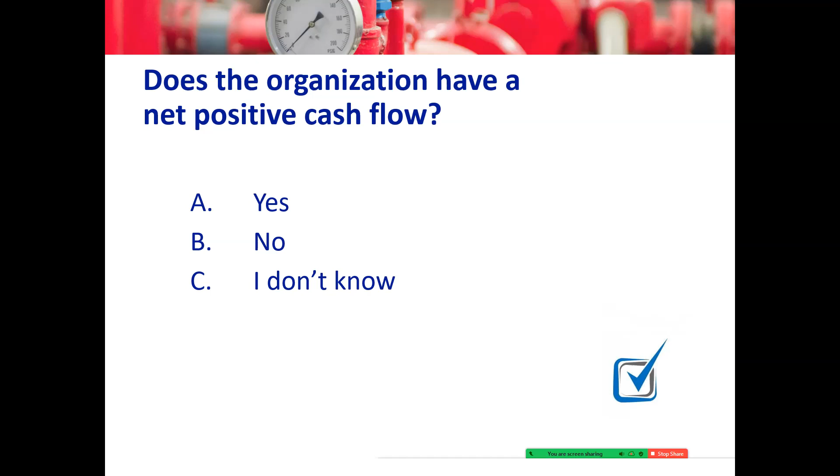All right, so everybody who does know the answer to this said yes. And for those of you who don't know, this too is a reasonable question. Particularly when you look at utility finances and how utilities and public works departments kind of function, there's a lot of internal promotion, and I would generally say if you like your organization, want to stay there and particularly become the boss at some point, you will be involved with finances most likely. So understand that these are reasonable questions to ask. And knowing the answer can help you with planning for your job. And as we will continue to stress, finances are very important for long-term sustainability of your utilities.

Third question here is, what are the challenges to having a net positive cash flow in your utility? So answer the one that's most reflective. You may see multiple stresses on the finances of your utility, so maybe the biggest stress, if that's the case. A, we need to increase our rates. B, we have a lot of debt, so that takes up most of the income. C, we're in need of too many projects. Or D, our funds get absorbed within our organization. We've actually adjusted this poll question to where you can answer more than one. Oh, thanks, John. Yeah, so answer all four if that's the case.

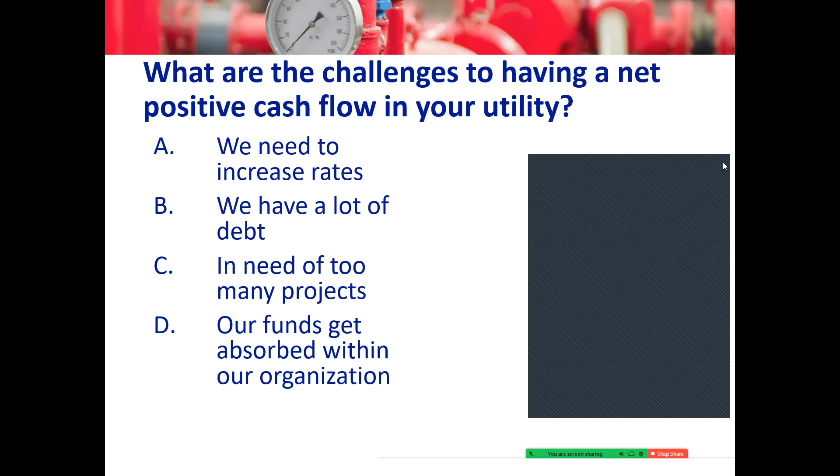All right, I'll go ahead and close this poll in 5, 4, 3, 2, and 1. Looks like a few people did answer more than one here. People answered all of them actually. The most answered was in need of too many projects. Again, asset management can really help with that planning process, and kind of what's coming up next with criticality is really helpful there.

So this is kind of a generalized slide, but for most publicly owned and operated utilities and financial systems, you kind of have two funding sources for keeping things going at your utility. So on the left, we're talking about capital projects. These are things that are larger, such as water main replacement. Some utilities would put expensive equipment, even vehicles, on the capital project side. For these, you typically have a mixture of funding sources that are available.

So we had Mike yesterday with the state revolving loan fund. That is external funding, so you're getting the money from outside of your organization. Internal funding is that which is raised or has been raised and saved, put aside in the past by your organization. So these would be your reserve funds and the flow of cash coming in to your utility monthly from your customer rates and fees. So for capital projects, you can save up money, you can borrow money, you can potentially get some grants. You can issue bonds if that's something your organization can do. You can take out a USDA loan if you're eligible. Occasionally, some utilities will also have a special fund.

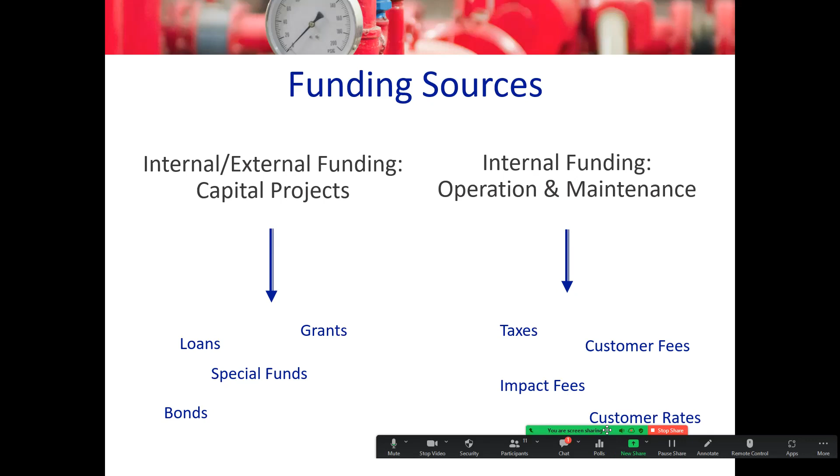All of this needs to be paid for via customer rates, customer fees. Occasionally there's some taxes or impact fees, but for most utilities, the bulk, 95%, is going to be from those monthly customer bills. Looks like we have something in the chat.

Oh, okay, good question from Judy here. She asked, what is debt forgiveness? Is that a grant, or if you have to first have a loan that is forgiven, does it require matching funding from the facility? So debt forgiveness, the state revolving loan funds have it. I've seen USDA rural development loans also have it. It is conditional. So you take on debt.

So let's say you have a $1 million project. You would take out $1 million of debt from the funder. So let's go with the state revolving loan fund. And this is an example, I don't know how Maine structures it. So you actually, as a system, would be indebted for that $1 million. And then there's typically language in the debt agreement that if you meet a certain milestone, then some of the debt is forgiven. I don't think I've ever seen 100% debt forgiveness, so it might be 30 or 40 or something like that.

So if you had that $1 million SRF loan with, say, 30% debt forgiveness, once you met that milestone, so let's say your wastewater treatment plant is up and running and compliant, might be kind of that trigger, then $300,000 would be forgiven, and you would be on the hook for paying the $700,000. So it's very similar to a grant in that you get resources from outside and you don't have to pay them back, but it's not quite as clean as a grant in some ways. If you don't meet it, then you are on the hook for that remaining money.

And if it were, oftentimes with any sort of an infrastructure grant, the match fund is actually going to be some sort of debt instrument. So your utility may get an SRF loan to be a match for a community development block grant, for example. Something like that is relatively common. I hope I answered that. Feel free to chime in the chat if there's further on that. So it's close to a grant, but it's a little different mechanics, to kind of oversimplify it.

Okay, moving on to rates. So rates are extraordinarily important for financial sustainability, for the ability to have operators like you have regular paychecks that don't bounce. And they're important for both that operation and maintenance, again, you basically have to have that internal funding, and also for your capital, because the rates for your water systems and sewer systems are going to almost always include money that is paying back previous loans for past capital improvements.

So maybe you had new lift stations put in 5 years ago, and you took out a USDA rural development loan or an SRF loan. More likely than not, some of those customer rates and fees are going to pay back that loan. Rates should be fair, equitable, and cover full cost, including reserve accounts. We do day-long trainings on this.

There's some pretty sophisticated work going on with how do you sustain utilities, particularly in communities that have maybe lost population or have very low household incomes. Because pipe's not any cheaper, pumps aren't any cheaper in a situation like that compared to a well-off community. So how do we ensure that people have quality services and health and environment are protected, and we don't overburden people? So there's a lot of discussion around equity, and the funders are taking that into account. They're very knowledgeable about that.

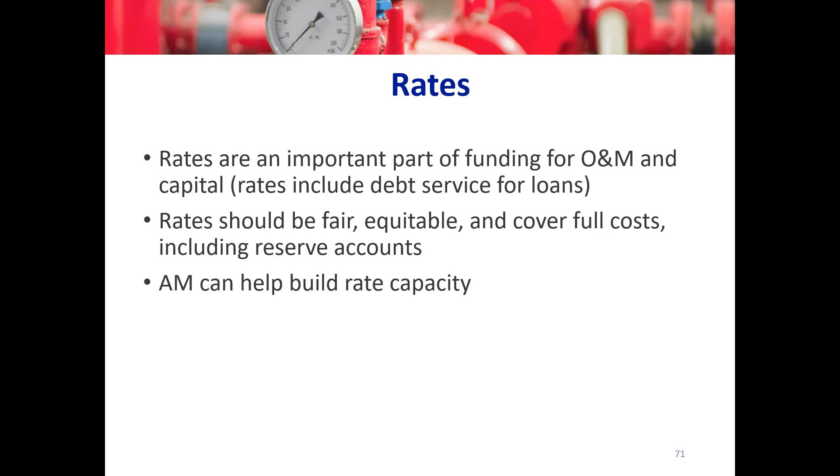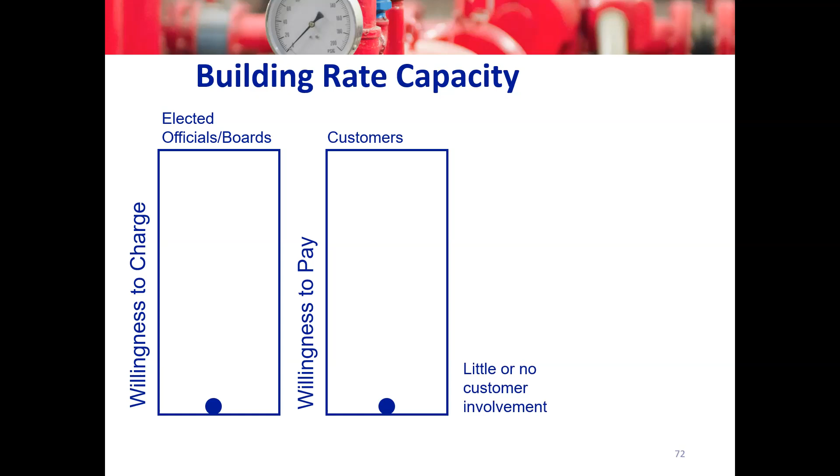The idea of rate capacity is that most communities have water and sewer rates that are not approaching the affordability for most of their customers. And in communities that have an elected official or board, there's kind of a willingness to charge, and then customers also have a willingness to pay. If you value the water or sewer service, you're going to be more willing to pay than if you kind of take it for granted. Unfortunately, utilities have often been quite reliable and quite cheap, so a willingness to pay is often not that high. We see with little to no customer involvement, both the willingness to charge and the willingness to pay is often relatively low compared to the ability to pay.

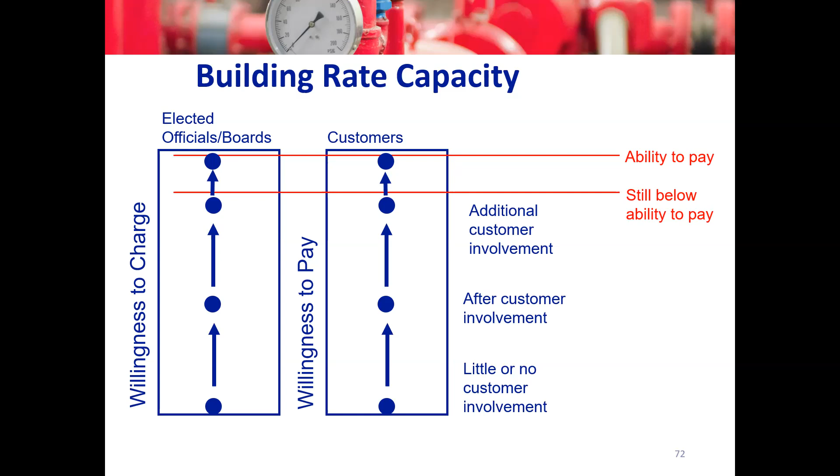Eventually, you do hit affordability thresholds. That's when things like grants, loan forgiveness become more important. And often it's some sort of an affordability threshold that the funder is taking into account when looking at, do I award community A or community B the grant? Oftentimes it'll come down to kind of the burden that utilities are placing on household incomes as a deciding factor.

Turn off my video here. This is a really good description of rate capacity from Louisville, so I'll let him take it from here.

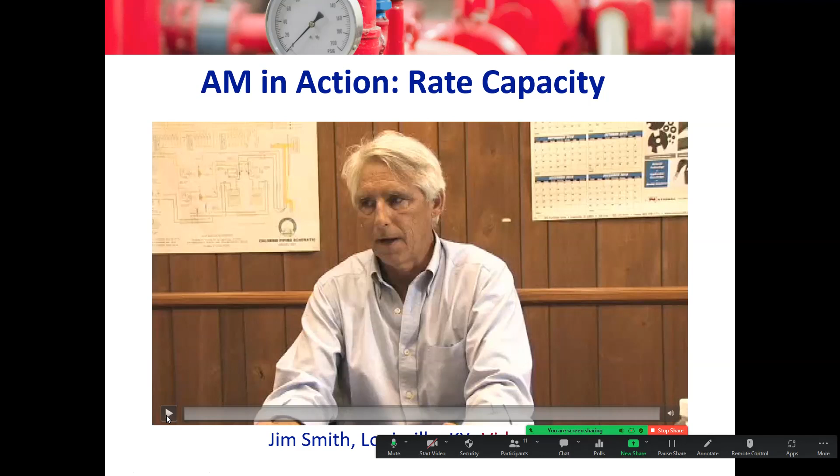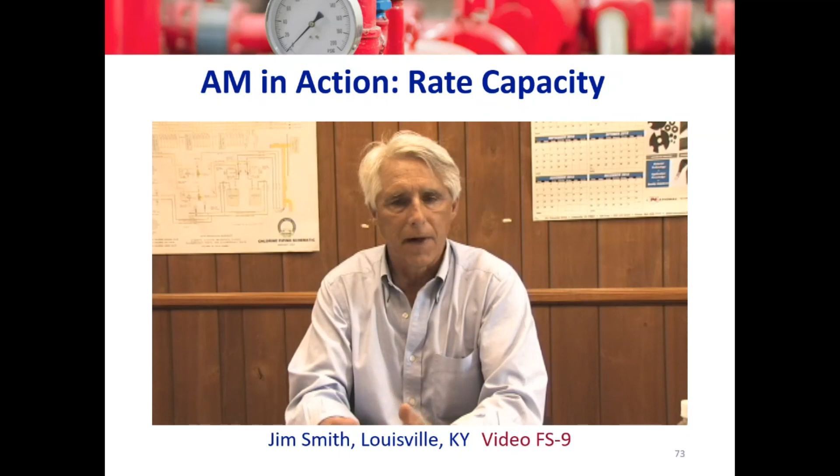I think if you ask customers whether they want another 20 cents on their bill a month to fund an infrastructure reserve, sure, you know. Now, at what point does that get to the point where we say, no, I don't want to do that anymore? But yeah, I think there's a lot more rate capacity out there if you bring your case to your stakeholders, which includes your customers and public, on what you're doing, and then follow it up with doing it and doing it well.

I'd also like to stress some funding for energy efficiency, and with both the bipartisan infrastructure law and the Inflation Reduction Act, I need to come back and relook at this slide because a lot of it is focused on climate change issues. For wastewater utilities in particular, water utilities to a lesser degree, energy can be a pretty big driving force of your cost, and there's often some pretty good savings. Energy efficiency projects sometimes can get different types of outside funding. So you wouldn't necessarily be going through the state revolving loan fund or USDA rural development utility loans.

You might be going through what's called an energy service company or an ESCO. And basically you're accelerating equipment replacement and maybe installing better control systems. The theory here is that your utility would take on some sort of debt, and the monthly or annual debt service is going to be less than the energy savings, potentially chemical and water savings as well. And therefore, everybody is kind of cash flow positive.

The energy service companies make some money by doing the project, and probably make a spread on the loan as well. And you as a utility have hopefully newer, more reliable equipment. You're saving a little bit of money on energy, and you're locking in that savings over the life of the equipment. So that is something to consider if you are looking at energy efficiency projects.

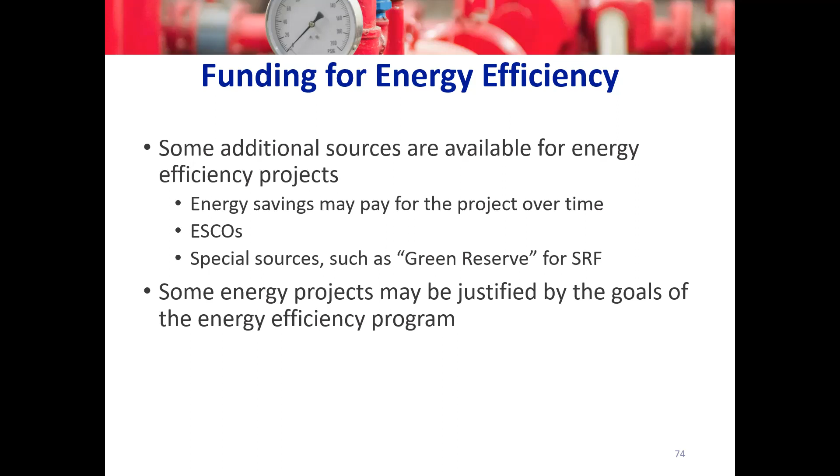Kind of depends on what your ammonia limits are, but there's still a lot of low-hanging fruit out there on the wastewater side. We're going to move on now to the fourth core component, that being criticality.

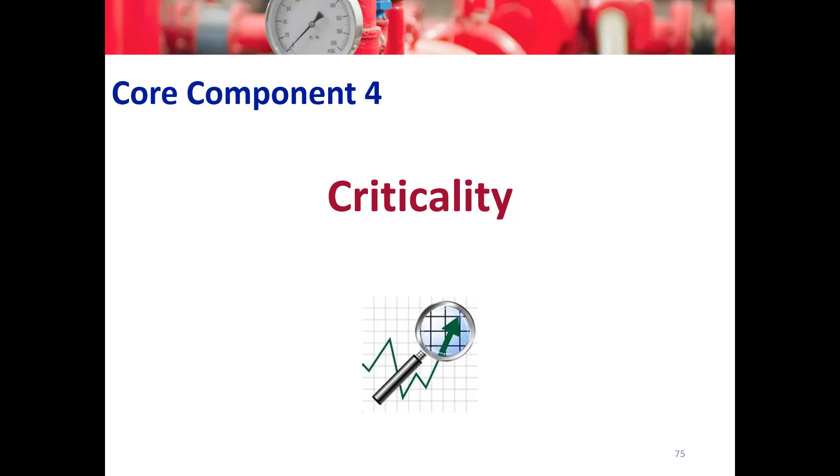So criticality is kind of my favorite. I think it has the best exercise of this 2-day training as well. So we'll just kind of get right into it. There's a few different components of criticality, and there's a lot of good online resources with regards to it. If this piques your interest, I'd suggest also reading up on the issue of redundancy when looking at criticality. This training doesn't go into it too much, basically for lack of time, but that also plays a very big role in criticality.

So, for the sake of this training, we're basically looking at two different components of criticality. The first one is, what is the probability or likelihood that an asset is going to fail? Is it high? Is it low? Is it something that's likely to fail multiple times in a year, or something that's likely to fail less than once a decade?

That's one thing we're looking at, but we also need to keep in mind failure isn't necessarily breaking. You might have, perhaps, a water well, and the well has MCLs. Let's say arsenic or nitrate has been creeping up in past years. The well's in perfectly fine shape—if we were giving it a condition assessment, it would be a 1, very good condition—but the well is going to fail to provide the level of service necessary if that nitrate or arsenic level continues to climb, because you won't be able to meet that MCL anymore.

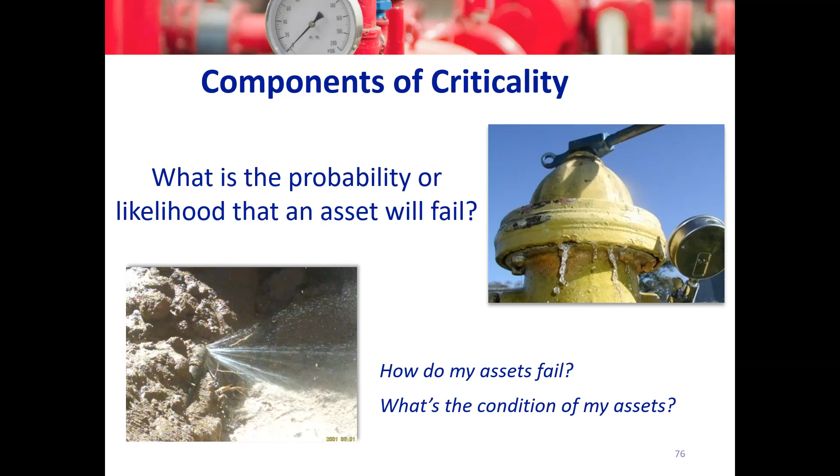Generally speaking, things that don't have moving parts tend to have longer lives than things with moving parts. So you would expect a water main to likely last longer than a fire hydrant, and a fire hydrant likely to last longer than, say, a blower system at a wastewater treatment facility. So that's another thing: how long does this type of asset last in general? The answer is the more moving parts and electronic components it has, the shorter the life generally. Those that are just a piece of metal standing in the air or buried underground, or a piece of plastic like that, tend to have lower probabilities of failure and longer lives.

The second thing we look at with criticality is, what is the consequence if the asset were to fail? For this, we have to look at consequences in a couple different lights.

Let's look at that water main break. Generally speaking, a water main break for most utilities is going to cost somewhere in the $1,500 to $2,000 range to cure, maybe a little more in Maine because you have to dig deeper holes, and it takes longer than here in Kansas, where our water mains are typically about 3 feet deep. I imagine yours are quite a bit deeper. So the cost to repair, maybe $2,000 to $2,500 for a typical water main break, by the time you have the labor, the street repair, the repair parts, and the loss of water. That's the cost of a water main repair.

However, there can also be other costs imposed on society. There can be legal costs, and there can be environmental costs from certain types of failures. On the wastewater side, there are a lot of permit violations related to sanitary sewer overflows or sewer treatment plant bypasses, and there's often a legal consequence for that. Oftentimes there's also an environmental consequence, and in some cases social consequences. Environmental consequences could be a fish kill. Social consequences could be something like a beach closure because the sewer plant hasn't effectively disinfected and it's not safe for water contact.

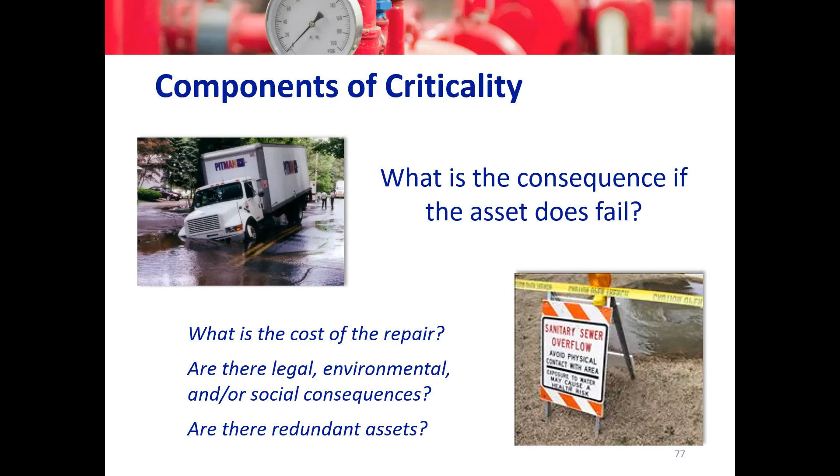So when we look at asset management planning and reinvesting in water and wastewater systems, one thing we often really emphasize is looking at the critical assets of your utility and investing in those assets at a higher rate than those that are not very critical. Likewise, when we look at operation and maintenance activities, it's generally better to direct your O&M toward the critical assets, so those you've identified as very critical get more attention, and those not deemed very critical get less.

So this question is asking if your organization has its assets prioritized by criticality.

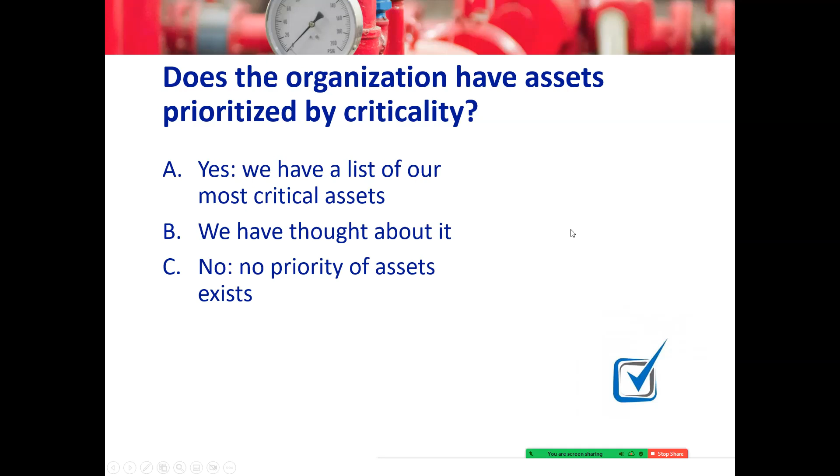So the next question here is, do the needs of the most critical assets drive investment decisions? Answer A, yes, we focus spending on our critical assets first, or B, no, but we need to get a system in place to do so. I do understand that B is a leading answer, leading question, I guess.

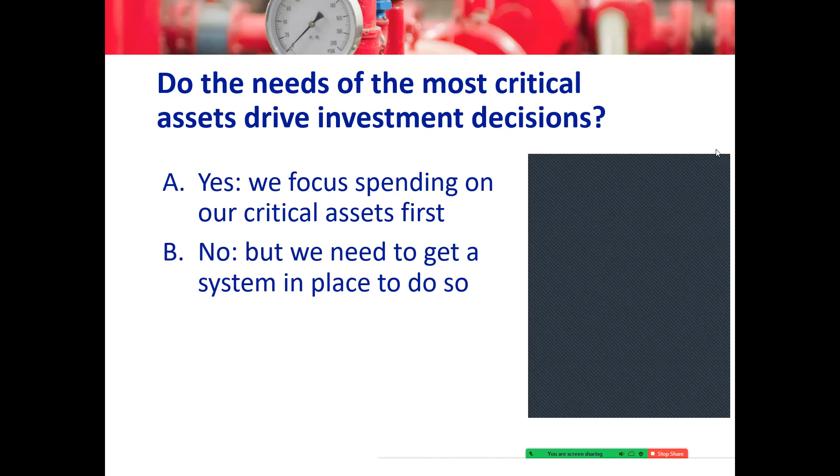Back to Louisville, he talks about criticality with regards to social consequences, like what happens if a system fails to our customers. Ultimately, that's why your utilities exist. Does it feed a critical customer? Does it feed a hospital? Does it feed a school? Does it feed a medical complex? So that's one consequence.

So when you start looking at doing risk assessments on your pipe, which essentially is what that pipe evaluation model did, but now we're doing more formal risk assessments, you've got the probability of occurrence - standard risk assessment stuff, how likely it is to fail. And secondly, what's the consequence of the failure? Part of the consequence is the cost of that failure, and then what it does to the service to the community. So if you have a pipe that, if it fails, puts out 200 people versus a pipe that puts out only 20 people, well, you need to spend more investment on that 200 people than you do on the 20 people, or at least do that first.

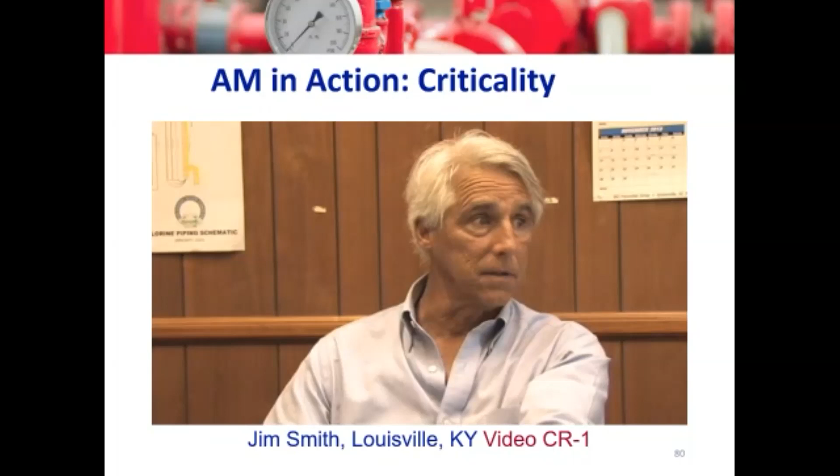So at the end, he's talking about where the investment should be headed.

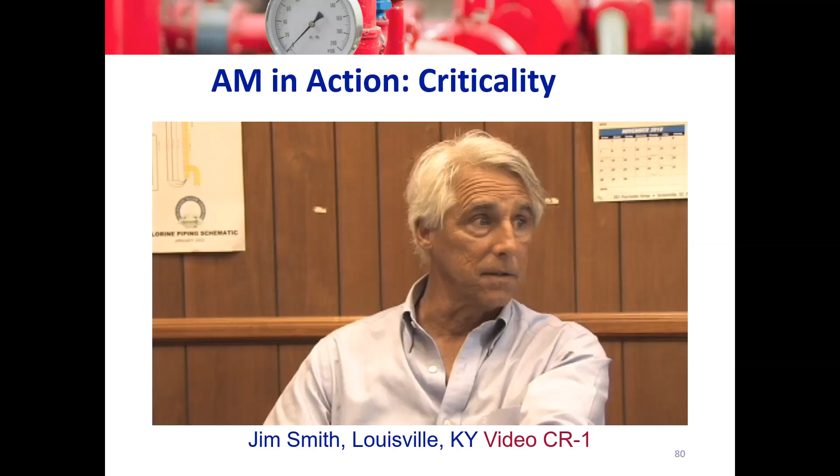We also try to outline this in a visual fashion, and we'll be doing this in an upcoming exercise. But the basic idea here is that you can group your assets into various risk categories. So the highest risk assets are going to be those that have a high probability and also a high consequence of failure. Let's think of a very large pump that's been in service for 35 years and has been having recent problems. The probability of failure is pretty high on that - there's moving parts, it's old, a good combination there that the failure might occur soon.

A large pump, at a minimum, to replace it is going to be quite costly for most utilities, and you will see consequences vary based on the utility.

So for most smaller utilities, a large pump failure is going to be pretty consequential just because it costs a lot of money. It will be more consequential if that lack of service, having that pump be offline, interrupts service, interrupts fire flow. Those are other consequences that may occur should it fail.

So basically, by rating the probability of failure and the consequence of failure of the assets in your community, you can begin to see those that are the higher risk, medium risk, and lower risk.

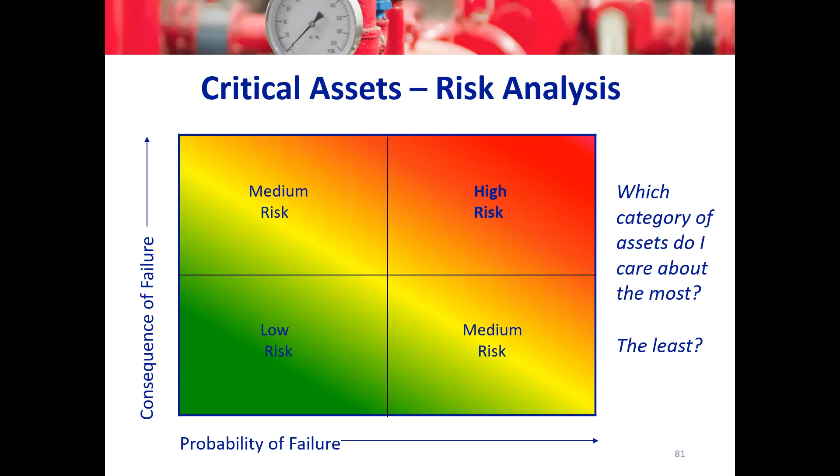Likewise, you only have so much money to reinvest every year. Which assets am I going to replace or rehabilitate? Ranking them by criticality is a good way to help reduce the risk of your assets.

Here's some of the work on the sewer side with regards to collection systems. I think on the collection system side, we were, up until about 10 years ago, totally reactive. And when CMOM, that phase started coming into place, then we truly became more proactive. And then we were finding a lot of our problems, collapsed pipe and et cetera, that we didn't even know were there. But then where we needed to take the next step was implementing the asset management program.

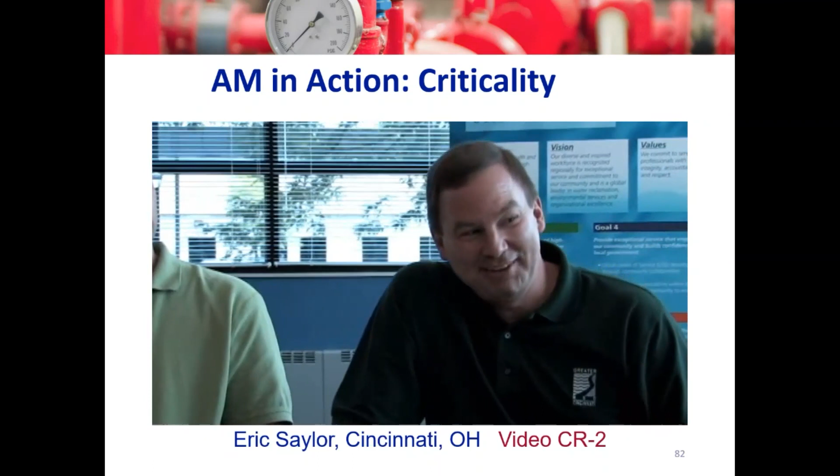Then there was no prioritization of that proactive work. We were treating our major interceptors with just as much importance as an 8-inch sanitary line in a cul-de-sac. And if you're living on that 8-inch sanitary line in the cul-de-sac, that is the most important thing to you possibly. But as a whole, as managing a department and managing your assets, you have to treat those differently.

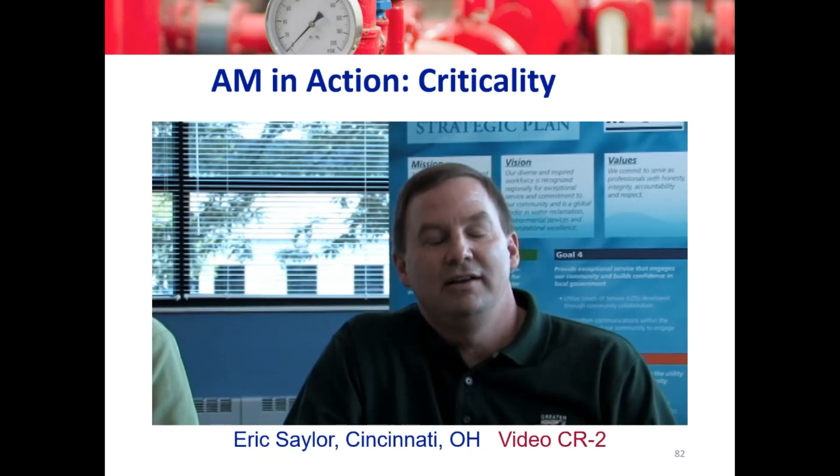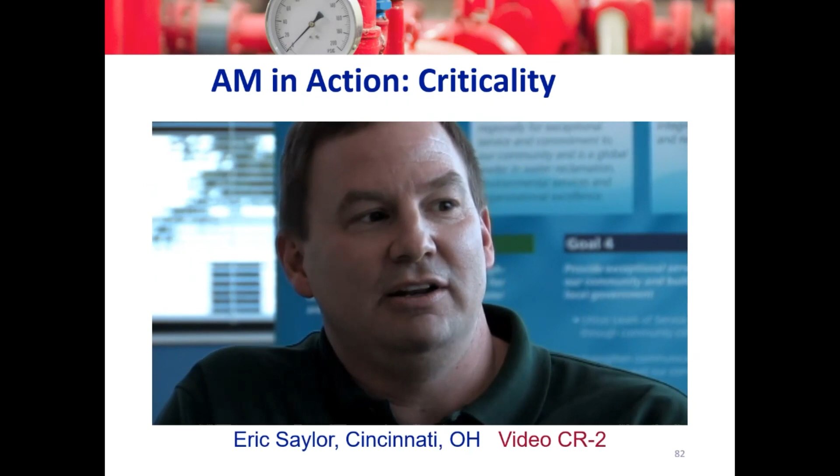And so one of the first things that we did on the collections side, under the strategic plan, was to form that risk task team. And that risk team was set out, their mission was to help us develop that criticality of the assets. What are our priorities as far as our maintenance goes? To be proactive, but yet to be logical in the proactive nature. And then in turn to develop that probability of failure, so you can properly prioritize your capital investments.

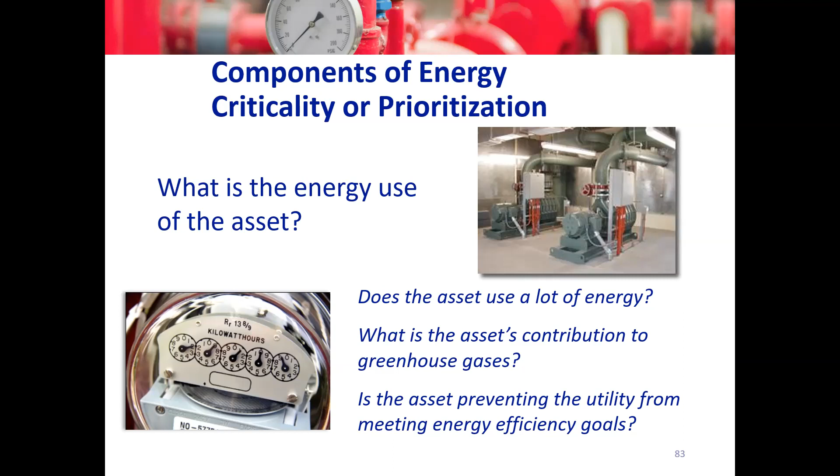So yeah, what he said, I think he laid that out well. I'd also like to highlight energy savings. So you can prioritize energy efficiency and energy savings projects in a similar manner to how you prioritize the criticality of your assets. You often would ask, what's the level of energy use of the asset, and then also what is the amount of potential savings of the asset.

So you can plot energy usage on the horizontal, feasibility of addressing energy usage on the vertical. A couple examples here: water is really heavy. If you have a large pump that's lifting water, your energy usage is going to be relatively high. Now, the feasibility of addressing that energy use maybe is medium-ish. You can get a more efficient motor, maybe put a variable frequency drive that would save some. But ultimately, you're going to use a lot of energy because you're lifting something heavy from a lower elevation to a higher elevation, so the feasibility isn't going to be super high on something like that.

On the other hand, let's say you have an old incandescent light bulb somewhere in your treatment facility. The energy usage in that, relative to your entire system, is going to be relatively low. But the feasibility of addressing the energy usage of an incandescent bulb is really, really high. I mean, you can reduce the energy use like 90% by going to the hardware store and getting a $3 light bulb in most cases. So the feasibility of that is going to be very high.

I will tell you, I used to be in the utilities at Hays, Kansas. We had an old activated sludge plant with anaerobic sludge digesters. And our sludge pump from the digesters was an old diaphragm pump, driven by compressed air. So the pump was a single point of failure in the plant. There was only one there, and it would have been kind of hard to put two, just based on how the plumbing was. And that was a relatively high consequence of failure.

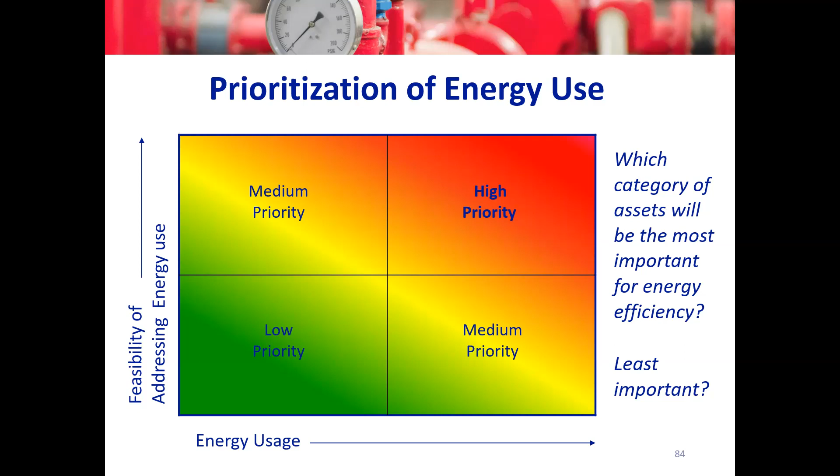So we're going to overlay energy use and criticality here. This old diaphragm pump, the probability of failure was pretty high. We'd had a lot of problems. It had a lot of years on it. I think parts were getting hard to find. So the probability of failure was towards the high end.

The energy use was also quite high. It wasn't blower-high, but it was higher than most things, and part of that was because it had a lot of moving parts. The energy use was high because its energy source was compressed air. Air compression is typically about 20% efficient, and then the diaphragm pump itself maybe is 60% efficient. So your energy efficiency from the wire to actually moving the liquid sludge is very, very low. That makes for very high feasibility of addressing energy usage, because you have like a 20% feeding a 60% — multiply those two together and you're like 10% efficient or something like that. So there's a lot of room for energy efficiency there.

Likewise, there's a lot of room for addressing consequences of failure. So we put in a type of screw pump, very simple, very low speed, also brand new. The efficiency of that from the wire to the water was probably in the 80%. And it was also just going to be more reliable, fewer moving parts, simpler design, much more energy efficient. So we had a high risk, high priority asset in our sewer system, and we replaced it and made it a pretty low risk and low priority asset from an energy use standpoint.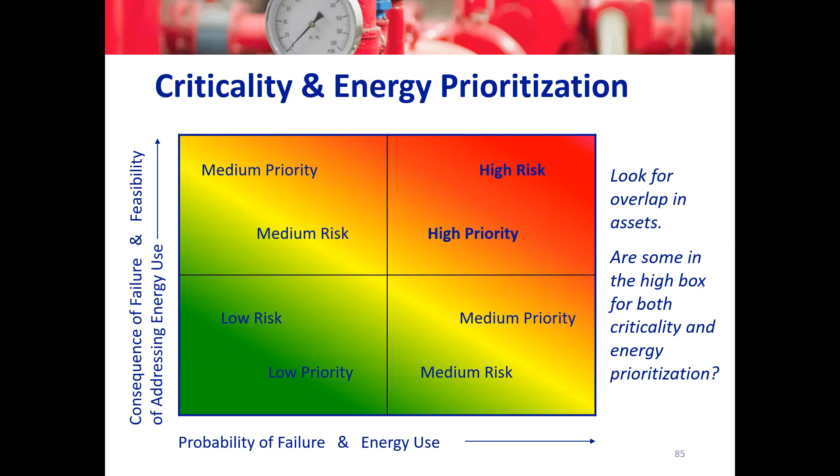It's important to keep in mind that criticality is something you have some levers of control over, but it's also a moving target, because your community changes over time. Where the schools are located, where a nursing home, where a hospital, where a factory is located, all can change over time. So we're going to go into a criticality workshop here.

This is from the AM KAN Work manual, which John will be providing a link to. These are worksheets that can be done for your own utility assets. It's important that we have a date on them, because as I mentioned, criticality can change over time. So what is a critical, high consequence of failure asset today, may be a lower consequence of failure asset 2 or 3 years from now, because something has changed, either your management and/or the customer base of your community's systems.

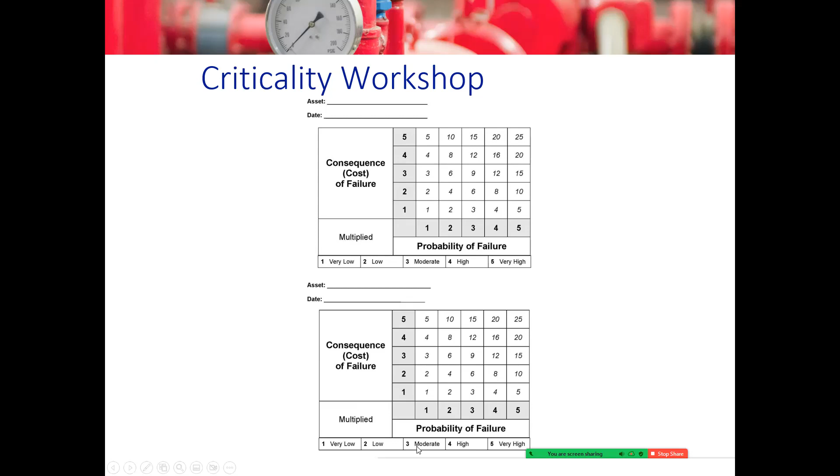So we're going to begin to walk through here. From yesterday, we have that well pump and that sewer pipe. Again, that well pump, we kind of said it's in pretty good shape. When it comes to redundancy, it's important to note that there's a well field and 2 wells exist, either of which can supply Green Village. So we have some redundancy there on that well pump, and likewise we have some redundancy with an upcoming asset that you'll see. Now that wastewater asset, that was the old concrete sewer pipe on a cul-de-sac.

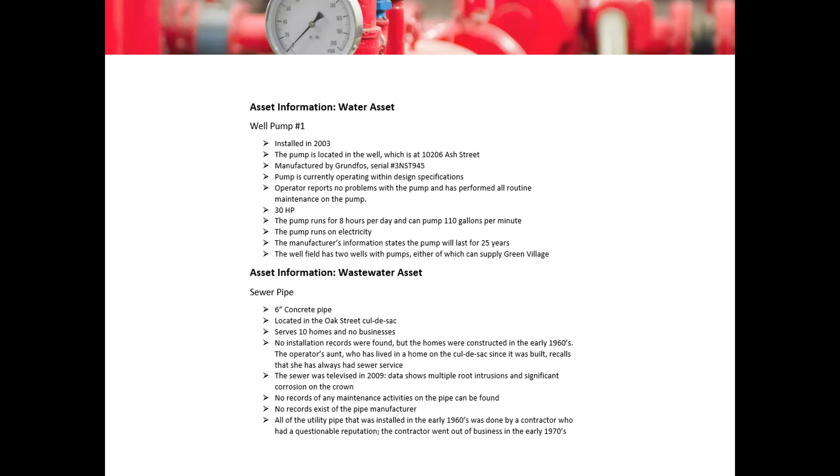I think we agreed it was like a 4, so pretty poor shape as far as the condition of it. We're going to introduce some new assets for Green Village here. The first one is a storage tank, 100,000 gallons. We know where it is. It was inspected and repainted back in 2002, so that's probably getting towards the end of that paint job. The operators perform visual inspections, but like most water operators, they're not tank experts. They haven't noted anything, so it's probably in relatively good shape.

It is possible to pump water directly from the well field to the customers, but the ability to provide fire flow is compromised, and it's often difficult to meet peak demands. And that makes sense. The wells can supply 110 gallons per minute. If you have both of them on, you're probably not doubling that flow. Maybe you can get 150. So you're not going to have fire flow in your community with a situation like that. The utility manager would like to add a new tank to help store water for firefighting.

Now, we're going to throw in another wastewater asset. So this is a surface aerator on the community's oxidation ditch. It's 125 horsepower fixed speed, so pretty high energy user. They think it was installed back in 95, and it's had a lot of problems in the last couple of years. So 11 total repairs in the last 2 years.

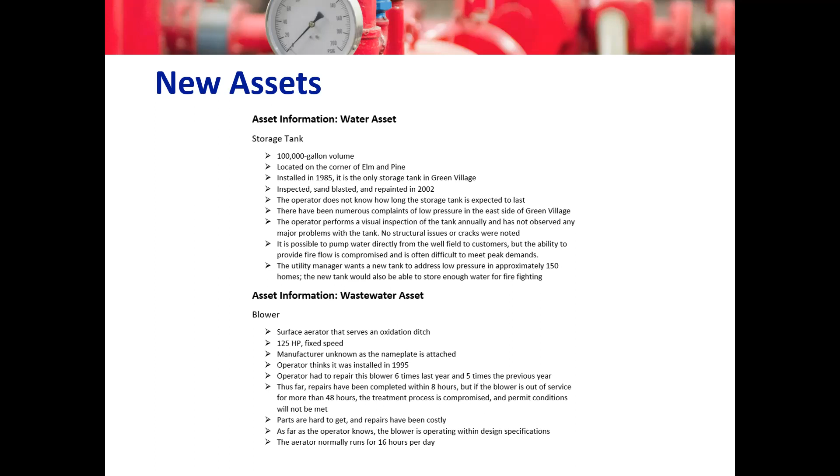They've been able to keep it going, but if it's out of service for 48 hours or more, the treatment process is going to be compromised. Permit conditions will not be met. Likely you'd be missing on ammonia, biochemical oxygen demand, and things like that. Parts have been hard to get and repairs have been costly. The operator thinks it's operating within the design spec. It runs 16 hours per day, so pretty high use asset.

All right, so we're going to try and outline these assets for the village of Green Village. So we're going to walk through this first, and then we'll be taking the temperature of the class for the additional assets. So the sewer pipe, when we're looking at the probability of failure and the consequence of failure in this example, we're going to give the probability of failure a 3. It's been in bad shape for quite a few years now. I believe the television was from 2009. It's still going. So probably not imminent risk, but certainly something that we should take care of.

The consequence of failure, we're going to put it at a 3 as well. So yes, it would be pretty consequential for those 10 houses in the community who receive service. But when you're looking at the whole broader system of Green Village sewer, it's probably not that big of a deal. So there's a lot of uncertainties. There's a lot of questions we don't know with this pipe. So when we're looking at gauging criticality of an asset, for this sewer pipe, there's quite a few things we can probably get more information about that can help us understand that probability of failure.

So the easiest one, the most logical, is run a sewer camera through the pipe. It's been 12, 13 years at this point. Things may have changed. They may be more or less the same. So being able to compare how things are versus how they were would be very valuable. If I were running or operating this utility, that'd probably be my highest priority to understand that probability of failure. Just get pictures, understand what's going on there.

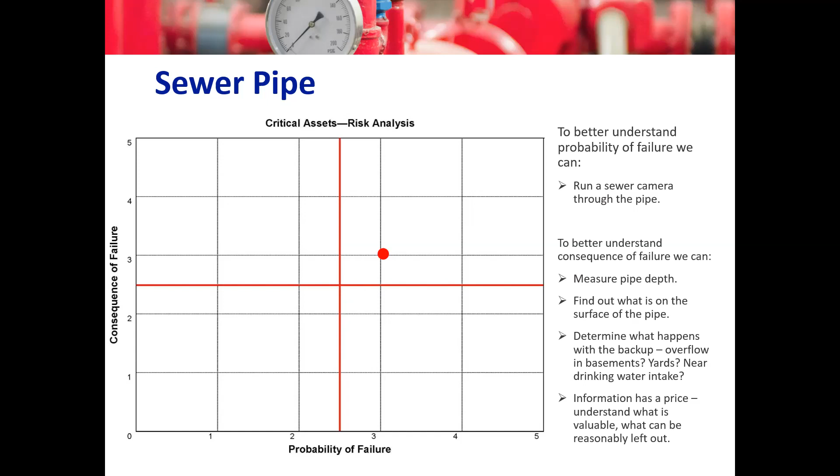So we're gonna have some polling on this one to gauge the relative probability of failure and consequence of failure of this storage tank asset. So as I mentioned, it's the only tank in town, installed back in '85. It's 100,000 gallons. It was inspected and repainted back in 2002. The operator checks it annually. There's no issues noted. The community can run without it to provide water to customers, but you're not going to really have fire flow in that case, knowing the information we know about Green Village as well.

So should be a poll coming up here. You'll need to scroll down on this poll. Go ahead and vote on the probability of failure. So 0 being it's not ever going to fail, to 5 being very likely, and likewise on consequence. 0, failure basically has no consequences. 5 being, it's the end of your utility. You may as well call it in. I'll give everybody just a little bit more time to answer this poll question. I'll go ahead and close it in 5, 4, 3.

All right, our answers varied quite a bit on probability from a 0 to a 3. So nobody thought it was imminently going to fail anyway. The consequences varied a lot, and this is often something we see on this storage tank question. Very high consequences to very low. Unfortunately, we're not able to tie Zoom into the presentation directly. We researched that. We're going to give it a probability of failure 2 and a consequence of 5. Open for debate on that.

So the probability of failure, a storage tank doesn't do a whole lot. The water comes in, water goes out. You need to have the vent proper. You need to prevent corrosion, things like that. But generally, water tanks don't fail all that often. And oftentimes the failure is caught before it's catastrophic. The failure is too much corrosion, too many problems with it, so a new one is built before you actually lose the service of it.

Now, the consequences we're going to put at a 5, primarily because of cost and the time during which you would be out of service. So, a storage tank, I don't know what the cost per gallon is these days, but this is going to be a 6, if not 7-figure type of project for the community.

Most communities aren't going to have that money available, so they'll have to go through some sort of a lending or grant program. It's going to take a while to get those resources, during which you have to live without it. Which if there's fire, depending on the community, is it a high fire risk community, low fire risk community? But needless to say, you're going to lose some fire coverage during a storage tank outage.

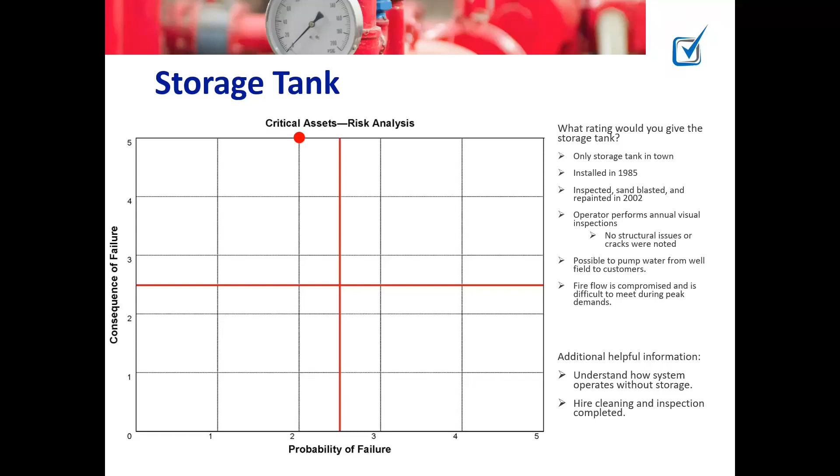You can also hire cleaning and inspection. So to better understand what's going on with the tank, if there are problems that the operator is unable to see, that would be helpful to know as well. We're now going to move to that well pump that we discussed yesterday. So what rating for probability of failure would you give, and the consequence of failure for this well pump? Back installed, 25-year life expectancy, but it was installed in 2003.

My poll just covered up my words. It's operating fine. There's been no problems, and it is one of 2 well pumps, either of which can supply the community in water. So this is another vote twice, probability followed by consequence. All right, I'll go ahead and close this poll in 5, 4, 3, 2, 1.

All right, we have answers all over the map on both of these, from pretty low probability of failure to relatively high. And then consequence, I guess the class was more consistent there, towards the lower end for consequence of failure. So a couple things on this. You'll begin to notice that criticality is really kind of utility specific. So, Green Village has 2 wells, either of which can supply the town. So it's not a huge emergency if a single well is out and you have relatively good prediction that you'll be able to get back up and running sometime soon.

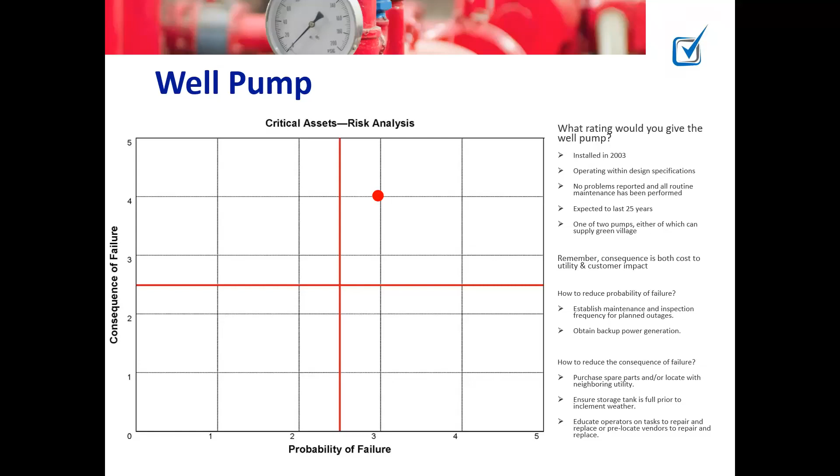We're going to do a similar exercise for the blower. Again, this is at an oxidation ditch. We don't know the manufacturer. There have been quite a few repairs in the last couple of years. There are permit compliance issues if it's out of service for 48 hours. Parts are hard to get, repairs are expensive, and it runs 16 hours per day.

So there should be a poll coming up on this one too. So vote on both of these.

Similar to the well pump, we're going to go through some exercises here. We put it at both a 5 and a 5. Again, the consequence of failure - I don't know how expensive it is, I don't know Green Village's budget, what their reserves are. The consequences of failure could potentially go down based on that.

But what can we do as utility operators and utility managers here? Let's look at probability of failure here. So again, similar to the well pump, we could go ahead and establish maintenance and inspection frequency, take it out of service on our time when we want it to be out of service to do the repairs and maintenance rather than on its time.

Similar to the wells, most wastewater plants have backup power generation, but not all do. That might be an issue here. You could fully rebuild the existing unit if you can find the parts to do it.

So you'd be taking the condition that we rated as poor, maybe it would go up to good. That's likely going to reduce the probability of problems. Better yet, you could replace with a new unit, keep the old for spare. So you're building redundancy into your system that way, drastically reducing the consequence of failure. Even better, you'd keep the old one for spare and rebuild the parts that need rebuilt on it, so you'd have a really reliable backup unit.

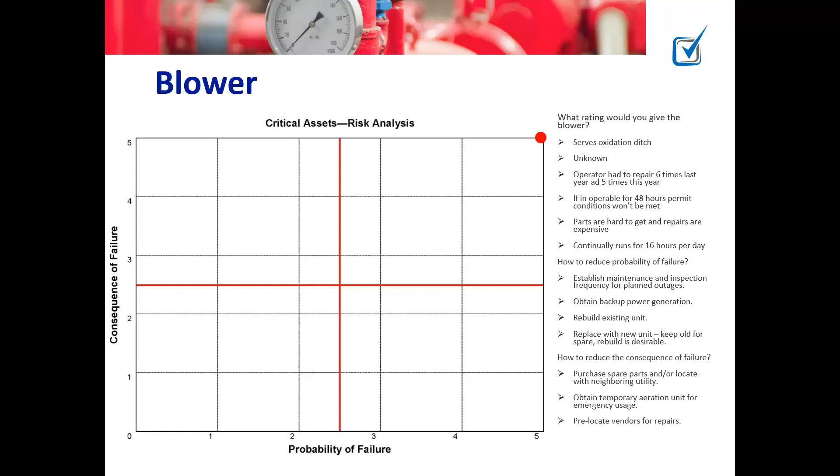Prelocating vendors for repair, similar to the well, could get you somewhere as well.

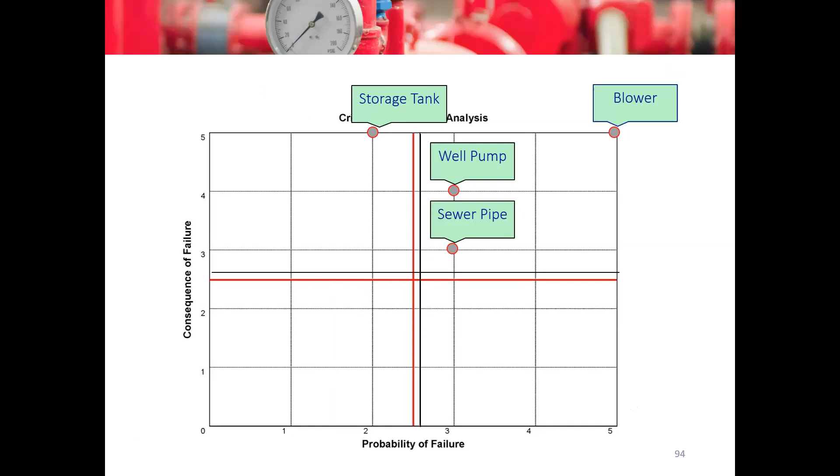So we're going to graph this out, and if you're the utility manager, the superintendent there in Green Village, you've graphed these out. You find that you have 3 high-risk assets, but the blower is the highest risk. So maybe that's the one we need to pay attention to in next year's budget in the upcoming capital improvement plan, and then maybe the well pump after that.

Obviously, when you do this for your own utility, you'll have very different results, most likely, because your utilities are different than Green Village's. Your utility's financial situation is different, your customer base is different, your treatment operations are different, your storage is different, and that's okay. It's very important to say that an asset in one community is going to have very different ratings than the exact same asset in another one.

So that well pump in Green Village is a high-risk asset. The well pump when I was at Hays, Kansas, was a low-risk asset. Same well pump, same cost, but the consequences are just different for the failure of it.

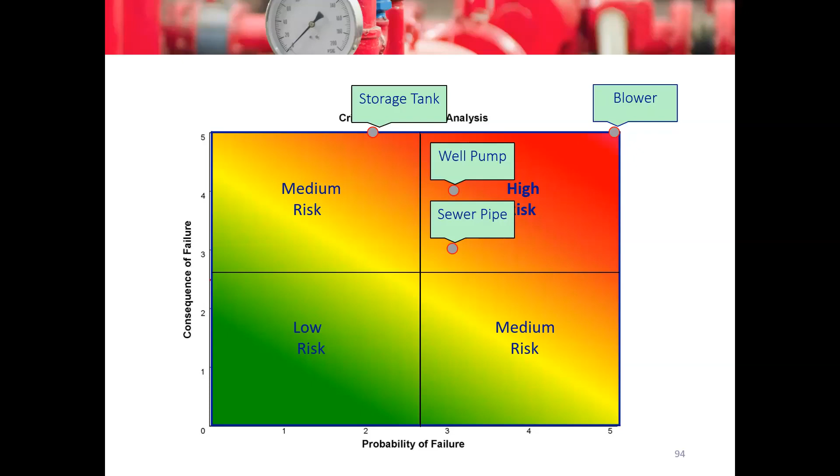So criticality, as we saw with our polling here, judgment calls are required, but they're still helpful. It's better to go through the process than to not go through the process. Not everyone may agree with every rating—that's okay. Come to a reasonable consensus there.

It should guide both maintenance and investment in your utility system. As you put capital back into your system, that's the reinvestment. And then the maintenance—maintain those higher-risk assets more, maybe less on those lower-risk assets.

Utilities can often reduce probabilities and/or consequences of failure by taking prudent actions before failure. So it's very important to understand that you have abilities to reduce the probabilities or consequences of failure of your assets.

So the idea of life cycle costing is that every utility asset you have, whether it's in the ground, in the air, whether it is powered or non-powered, whether it consumes chemicals, whether it consumes a lot of labor, has costs that occur from the initial design all the way to the abandonment or removal and sale or disposal of the asset. So some of those costs are going to be the capital.

Often that's going to be the largest cost, but sometimes not. Operation and maintenance are going to be major costs—sometimes operation and maintenance are the highest cost of a life cycle for an asset. Sometimes repairs are going to be major, sometimes not. Rehabilitation—sometimes you rehabilitate assets, sometimes you don't.

So sewer mains, sewer manholes, very likely to be rehabilitated. Water mains, pretty unlikely. You may have legal-related costs or environmental-related costs to some of the assets, either their initial installation or their ongoing, continued operation. So environmental cost—maybe if you have a water main, or more likely a sewer main, you might have some wetland impacts when you install it.

That's an environmental cost that you have to offset. Legal is often, you have to have permits. You have to have a system of control that you legally own it, that you have proper rights of way, and things like that would be examples of legal costs.

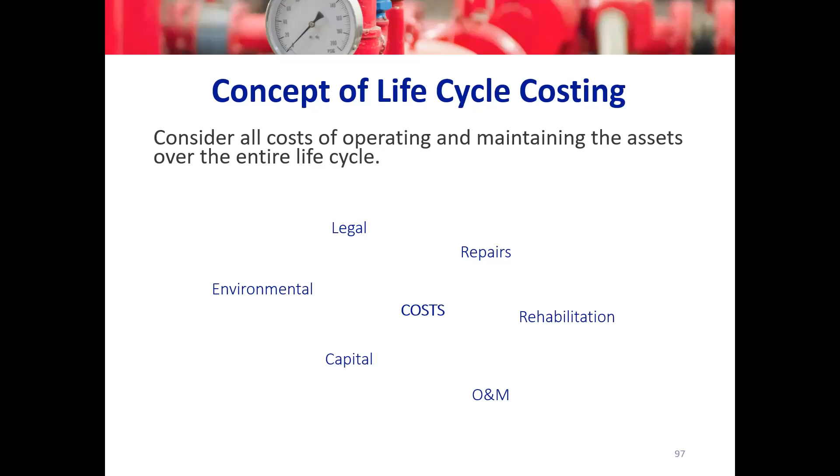So if you're looking at electric motor A and electric motor B, and electric motor A is 2% more efficient but 10% more costly, it's still probably worth going with the electric motor that is more efficient and more costly up front, because you'll save it over time, assuming it's a high use electric motor. Now, if it's an electric motor that powers a backwash pump that's used for 10 minutes every day, it might not be worth going with the more efficient one from a life cycle perspective.

The basic concept is to compare your options when we're looking at life cycle costing. So most of the time, utilities are not looking at, should I buy a whole new utility system? It's rather, I have an individual asset and I need to figure out how to manage it. So in this option, we're doing more maintenance to the asset, getting a longer life out of it with option one. So we're spending more money on operation and maintenance and repair over time, hopefully getting a 30-year life out of it. This could be something with moving parts that you rebuild, maybe a pump, for example.

Option two, you're going to say, nah, I'm not going to rehabilitate it. I'm not going to spend so much money on repair. I'm just going to replace it more often. So by doing the math, you have option two. You're going to just buy new replacements more often, do less maintenance, spend less annually on that. You're not going to do a rehabilitation. Figure out the cost over the life cycle.

In this example, for a 30-year time horizon, option one is $250,000 in cost. Option two is $300,000 in cost. So when we're considering life cycle cost here, option one is best.

Talk to your finance people. They're going to say, well, what about interest cost, time value of money, and things like that? Relevant, but for the sake of an example here, to keep it simple, we did ignore those things. Inflation would obviously be something you would look at as well when looking at life cycle costing.

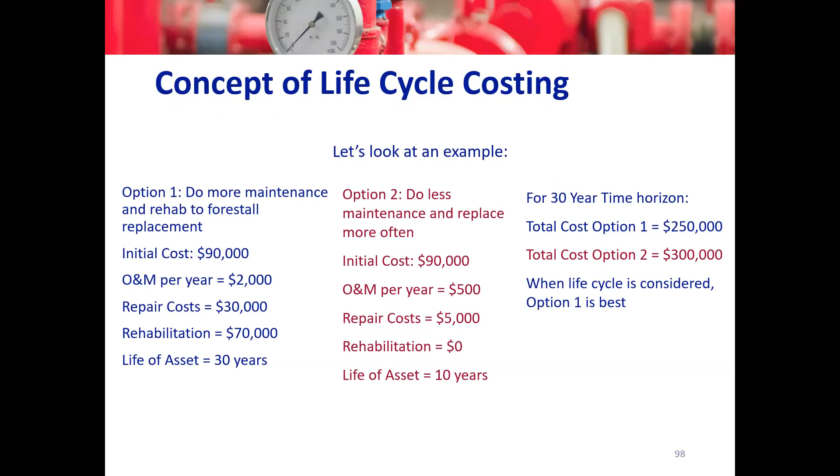And there's other things to consider as well. So option two may actually have less risk of failure, because you always have a newer asset in service, whereas in year 28 and 29 of option number one... your risk of failure might be quite high. So there might be other reasons to not go solely by life cycle costing. Level of service would be a good example that you would also need to bring into consideration.

Generally speaking, though, routine and preventative maintenance can help extend the life of an asset. That's true for your own homes, your own vehicles, and for most assets within a utility system. However, maintenance takes resources. It takes operator time and it takes supplies. Sometimes supplies are pretty expensive, sometimes not. It can also take tools that are not cheap.

Sewer jetting, sewer camera work, that's pretty expensive equipment to be able to do those tasks. Turning a valve, less expensive equipment. You can do it by hand, but that's more time. You can do it with mechanical valve turning, less time, more supplies. So in any case, maintenance takes resources to do, and trying to balance what to do and when to do it, asset management planning would generally advocate utilizing that concept of risk, so that criticality ranking comes into play there.

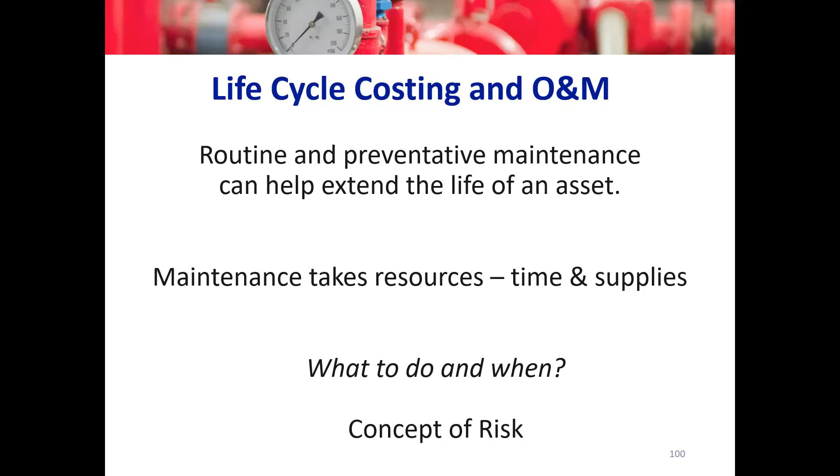So when you're looking at your operation and maintenance decisions in your own utilities, do you let risk drive your operation and maintenance decisions? Answer A, yes, our operation and maintenance focuses on our high priority assets first. Yes, we do O&M on almost all your assets, or no, we do not have an O&M plan in place.

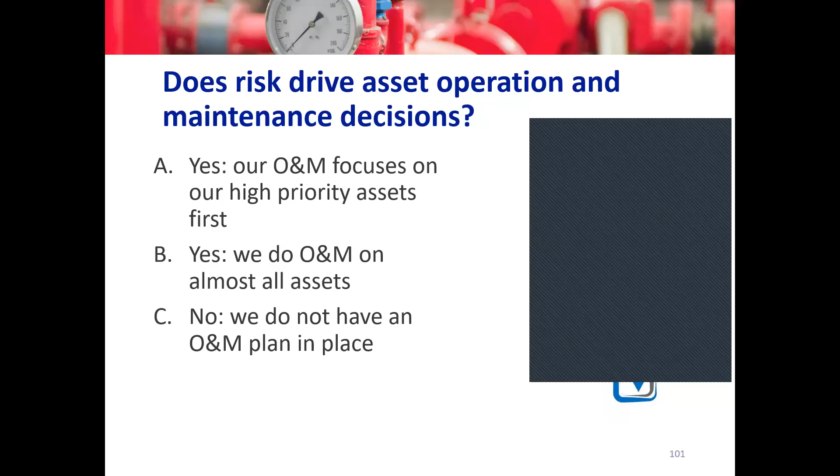So on your higher risk assets, preventative maintenance is very important to try to prevent or forestall failures. Likewise, every time you visit the asset, you have either a formal or informal inspection of it. People get familiar with how things sound, how things feel, how much heat it produces. So the more times you're near that asset, the more likely you are to detect problems before they become failures, often the case with something like a pump or a blower.

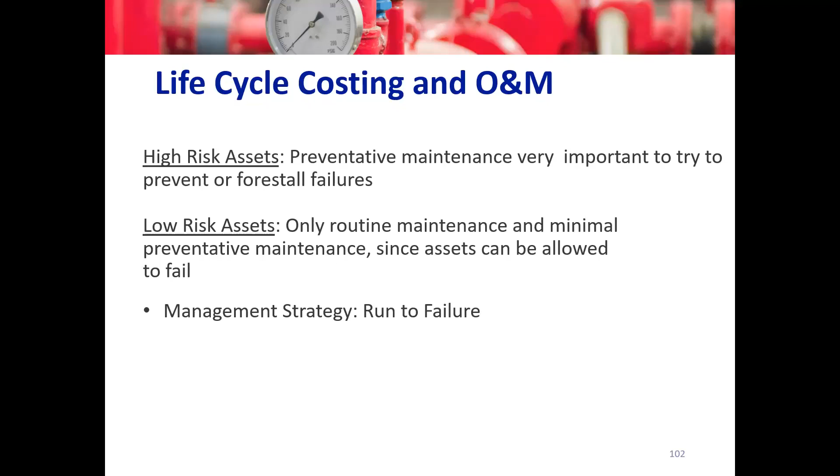Your lower risk assets, so maybe only routine maintenance and minimal preventative maintenance, since those assets can be allowed to fail. The management strategy here is called run to failure. And it's talked about here in Cincinnati. So here we go.

And I think that's a tough concept. Being an engineer, that's a tough concept to swallow, that you're not going to nail it perfect the first time, that you're going to have lessons learned. There's a lot of other concepts, I think, with asset management that are tough for engineers to swallow. I remember 4 years ago, the first time I heard the concept of run to failure, I said, well, that's ridiculous. We're not going to run anything to failure. We're not going to do that here.

Having, at that time, been in the collection system, I thought, I'm not running anything to failure. As an engineer, I'm trained with a mindset of, I'm going to repair this situation, I'm going to resolve this problem. And the reality of it is, when you properly prioritize your assets across the board, you can't fix everything right away. So, yeah, you will have to run things to failure, as much as that goes against the grain of what engineers have been taught, and even just utilities in general have been taught over time.

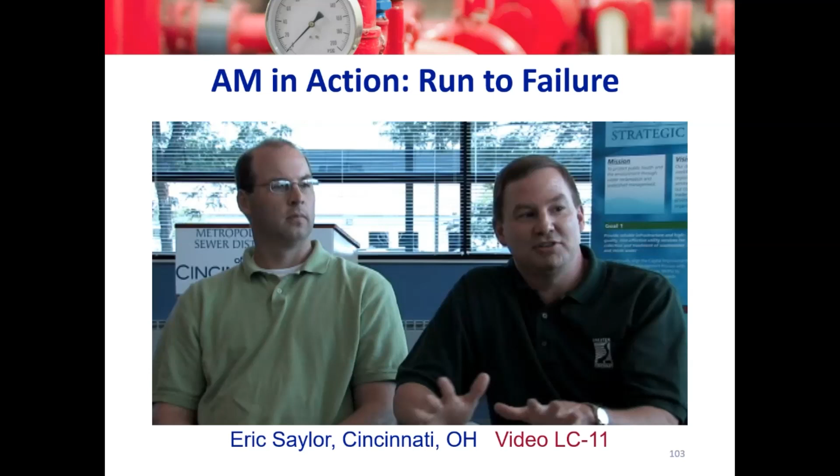So even if you are a utility who does have the capacity to do maintenance on all of your assets on a regular basis, it may still be worth moving some of that maintenance time and money to those higher risk assets. I know historically a lot of wastewater utilities have attempted to do some fraction of cleaning on their sewer lines on an annual basis, oftentimes 20 or 25%, so you get around to the entire system every 4 or 5 years.

Now, for utilities that have some newer lines, or places where there's been cured-in-place pipe, it really generally won't make a whole lot of sense to clean and camera those brand new lines that frequently, unless there are known problems. So maybe you have a strip of fast food restaurants that cause grease problems, or there's an industry that causes problems, or there's a sag in the pipe or something.

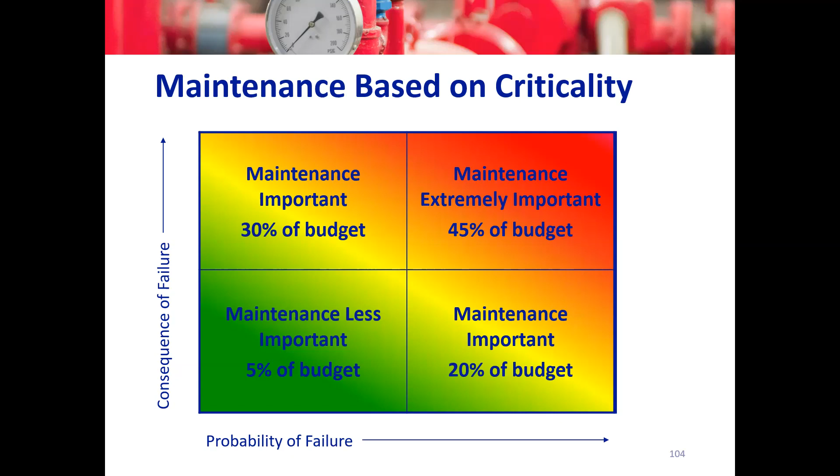We also want to look at life cycle costing when it comes to replacing your assets. We've all probably had something either at our utilities or as a piece of personal property that just became too expensive to keep. If you look at asset condition over time, as time progresses, your condition goes from great, it's brand new, and it degrades. Some things degrade pretty quickly, maybe a pair of cheap shoes. Some things degrade quite slowly. So like a new sewer pipe is going to degrade quite slowly, but once it starts to go, it could go pretty quickly. So understanding how things decay over time, how their repairs become more frequent, is important.

So to minimize life cycle costing of your assets, if you replace it too early, you're likely to waste money by not using all of an asset's life. Historically, not in the last year or two, if you'd bought a car every year, you're throwing away a lot of money, because the value decreases a lot faster than the functionality of most new cars. Last year or two, kind of crazy, so throw that example out.

Now, if you replace it too late, you're wasting money because the repair will be more expensive. So let's go back to a vehicle. If the transmission is causing problems and your engine is smoking on a 15-year-old car, does it make any sense to repair it any longer? The answer, probably not. So you don't want to replace it too late because the repairs start to really consume a lot of money and time. So you kind of want to have a good balance there.

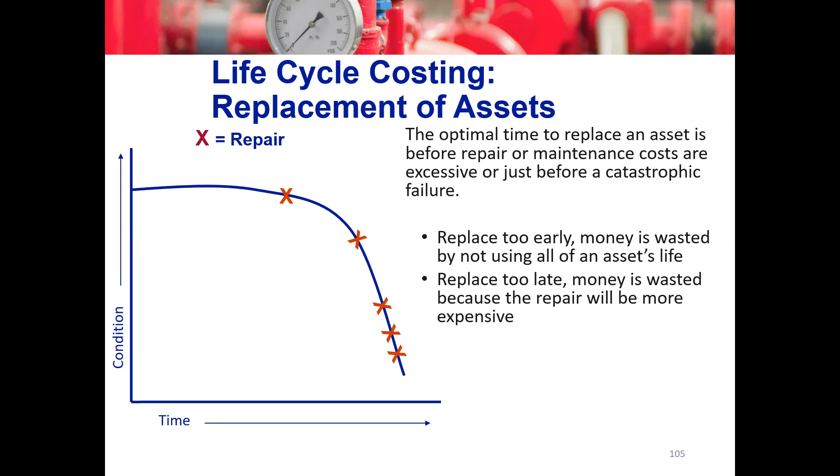The optimal replacement point is going to vary based upon how critical that asset is. So if it's a single point of failure with really high consequences of failure, the optimal replacement point is going to be earlier. This would be something like an ambulance. An ambulance is typically replaced relatively early in its life cycle because the consequence of failure is pretty high. People can die if the engine goes out on the way to the hospital. But if it's a push mower that you use around your well house, the optimal replacement point is going to be later in time because it doesn't really matter. If it breaks, I can go get a new one anytime I want to, and the worst thing that happens is the grass is a little taller than it should have been. So consequences of failure matter a lot when you're looking.

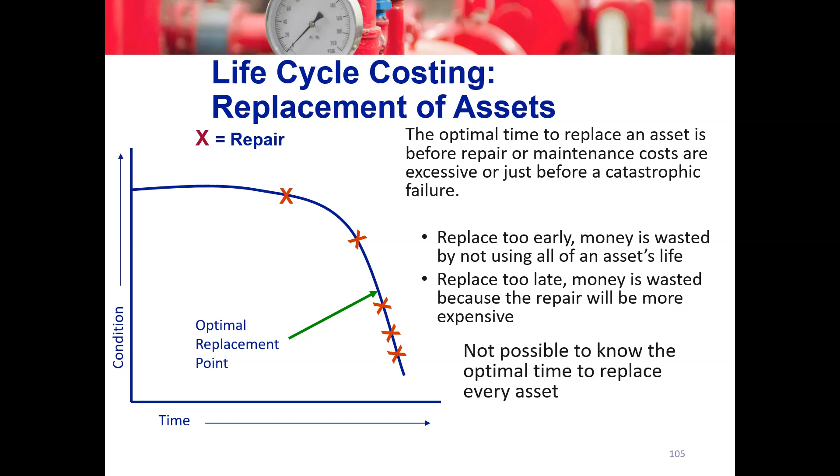It is not possible to know the optimal time to replace every asset. This diagram shows the optimal replacement point right before a repair is needed. Do we generally know when a repair is going to be needed? No, not generally. So it's a little bit of your best judgment here, but knowing whether you want to replace it early in its life cycle or later in its life cycle is very useful. Utilize that concept of risk again: on your high risk assets, err on the side of replacing too soon before failure. Think like an ambulance, you want to replace it in a planned manner. So you may have some pump systems that every 10 years you pull them and replace them.

That way you have continued reliability with them. So your replacement point is going to be when they're in relatively good condition. Now, some utilities would have some ability to move some of these assets around. So, I've seen municipalities where the police vehicles are kept on for summer help later on. You can maybe do that within your utility systems, move some pumps around to lower critical assets. That may be appropriate in some cases.

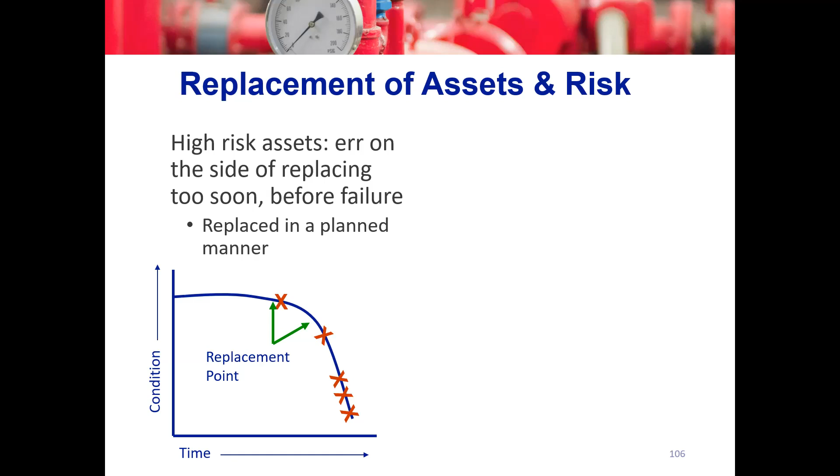Now, your lower risk assets, as they were talking about in that Ohio utility, you're going to allow them to run to failure and then replace them afterwards. So you're going to have managed failure. So, that push mower, that small lift station pump, done a couple of repairs on it. It's time to replace it next time it goes out. So you plan that the next failure that occurs there, the next repair that's needed, it goes out of service and you replace it with something new.

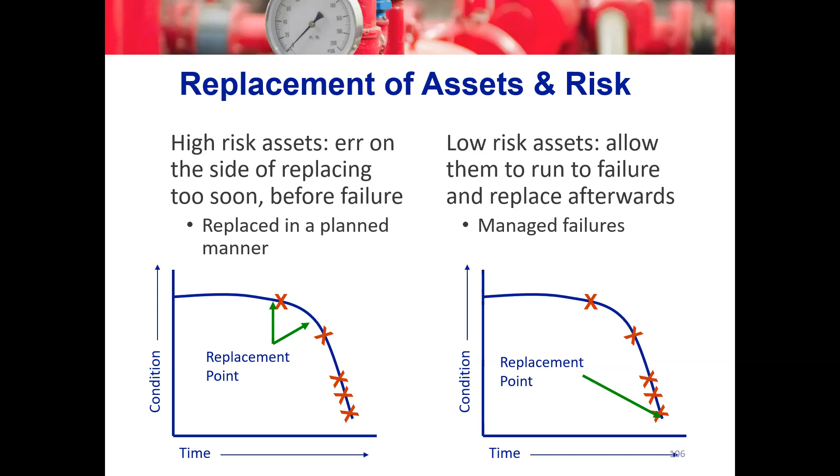So part of having good life cycle costing is having planning for when and how you spend your money. This is generally referred to as a capital improvement plan. So basically, a capital improvement plan is a series of larger projects that is laid out over some sort of time frame, typically 5 to 10 to 20 year time frame. So your capital improvement plan might include a new storage tower 7 years in the future. It might include replacement of 2 lift stations 3 years in the future, and then maybe some line replacements in between years. So does your organization have a capital improvement plan on this poll?

All right, so looks like we have a couple even with 20-year plans. That's kind of surprising. And then we have a couple with 5-year plans, and then one that had no formal plans. So anyway, capital improvement plans are important for long-term sustainability of your system, and they help inform what rates you need. They help inform what kind of financing I should be pursuing right now. So oftentimes utilities will try to maintain a consistent level of debt as they pay off an old SRF loan. They'll be able to bring on new without having to increase rates. So a capital plan helps with that as well.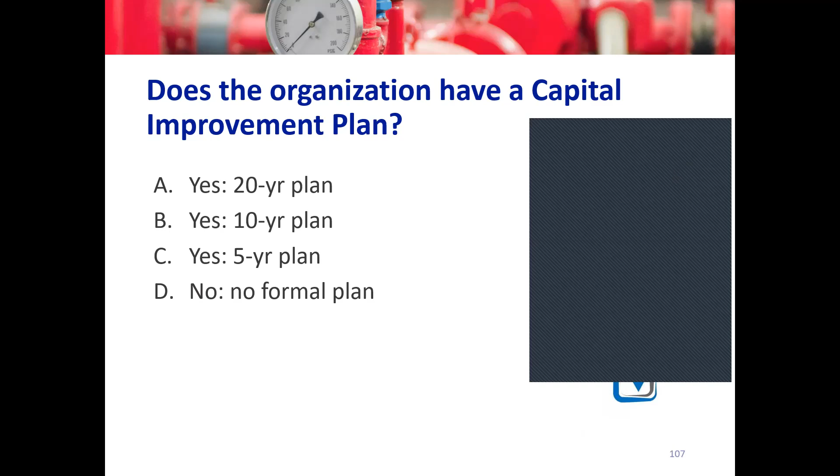And they also help you prepare for regulatory changes. Generally, a regulatory change, you have some time to respond to it. Your capital improvement plan can say, okay, to meet my new ammonia limit, for example, I'm going to need to invest a certain amount 3 or 4 years into the future, and you're able to plan with that. So move on here. So your capital improvement plan also helps you with validating and ensuring that you're doing the right project at the right time at the right cost.

So we've probably all seen those assets that, like, why was this built like this? And oftentimes something went wrong in the planning process. So I've been to wastewater treatment plants that are 3 times too large for the community. In that planning process, to be cynical, I would say the design engineers promoted that the community was growing a lot faster than it actually was. Their incentives were aligned with that. Design engineers often get paid as a fraction of the total cost of the project. So bigger project, more pay.

Had the capital improvement planning process gone better, the community would have said, okay, that's a nice projection, but we are where we are right now. Let's plan and build out for the next 10 years instead of maybe the next 40 years. So that would be a good validation procedure. So you really want to make sure that the capital improvement is needed. You really want to make sure you've chosen the correct alternative, because you typically don't get redos with a capital improvement. So that community whose sewer treatment plant is 3 times larger than needed, they can't just go and replace it. They're still paying off the construction of it. The alternative is not really an alternative anymore because the financial capacity has been taken up.

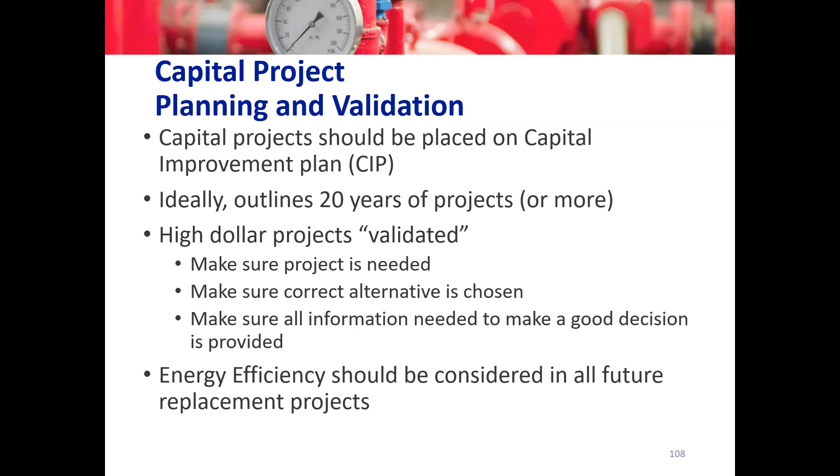You also need to make sure all information needed to make a good decision is provided. When there's assumptions being made, question them. Is our town really going to grow this fast? Are there additional conservation efforts that are going to decrease our sewer flow? If you're a coastal community in Maine, what does sea level rise, what does climate change impact with us? Energy efficiency should also be considered in all future replacement projects, because that really drives some of those life cycle costs of the project. We're now going to wrap up with asset management implementation.

So Louisville has a few words of advice for you here. First of all, know your assets, know how well they're performing, and based on that, that'll define the needs that you have. And then embrace your stockholders and stakeholders, letting them know and bringing them on board for what needs to get done. I think that's the key piece.

And the other one is just do it. Don't wait. You got to do it. The benefits are there, and any little bit you do, you'll see a great amount of benefit. So yeah, and I would totally echo that.

We went through those 5 core components, and you might be saying to yourself, well, that one doesn't make a lot of sense. I don't feel a need for it, but there might be something that would be really, really helpful to you. So feel free to take up just that. Or maybe you're thinking, well, I don't need asset management. My collection system's in really good shape.

But maybe your lift stations aren't, or maybe at your treatment facility a lot of the equipment's reaching the end of its life. It's okay to do it just on part of your system, and really hone your skills on that. You don't have to tackle everything at once, but maybe consider a place where it's going to be most valuable to you. So any of the activities in asset management can help lead to improvements.

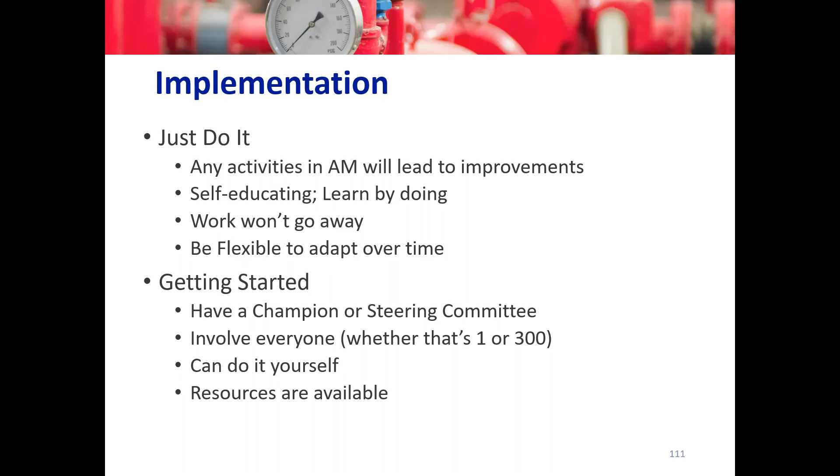One place where outside help is typically very valuable is with mapping and condition assessment efforts. We talked storage tanks. Perhaps if you've not run a camera through your sanitary sewer system, outside help can really bring you a lot of information relatively quickly there. There's a lot of resources available. You can contact me or John or some of my colleagues at the Environmental Finance Center Network. A lot of technical service providers throughout the country are also helpful, depending on how the states have set up their contracts with rural water associations and things like that. So there's a lot of good information out there to help you get started.

You might be asking, well, where do I start? Honestly, anywhere. We went through 5 different core components. You don't have to start or go in the order we went in. Some starting points: maybe what really makes sense to you. Where's the highest need? It might be what's easiest. Do the easiest if you're like, okay, this is important, I need to understand what I'm doing before jumping into it. So do the easiest part. Fire hydrants would be a good option.

It might be what you know best. So maybe you spend most of your time at the treatment facility. You know all of the equipment. You know its condition. Put it down on paper. Begin the asset management plan there. It might be what you can see, or it might be what's most important to either your staff, customers, or the governing body, perhaps your regulator as well.

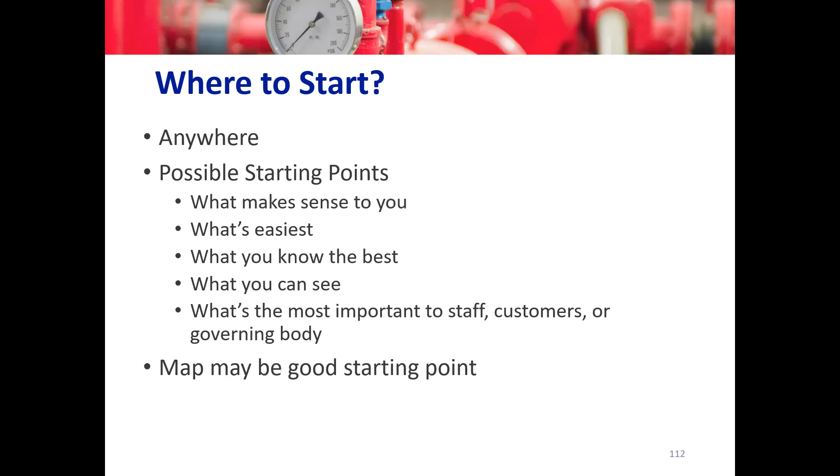If you don't have that good map, and some of you said that you did not have electronic maps, a good GIS electronic map may be a good starting point for you to consider. So anytime you start something, having some easy wins is good to keep the momentum going. So you gain support both within your organization, with your customers and governing body, by documenting and celebrating some of those successes. So if you have a map developed where there wasn't one, show it off.

Go to a commission meeting and take five or 10 minutes on the agenda and say, look, this is what we now have. This is some of the powerful tools of it. This is how I plan to use it in the future. You might also try to document some savings on capital projects. So basically documenting the savings amount. So say our asset management plan helped us better define a scope for this capital project. We save money because it meets our needs now, and it's really the project we need right now.

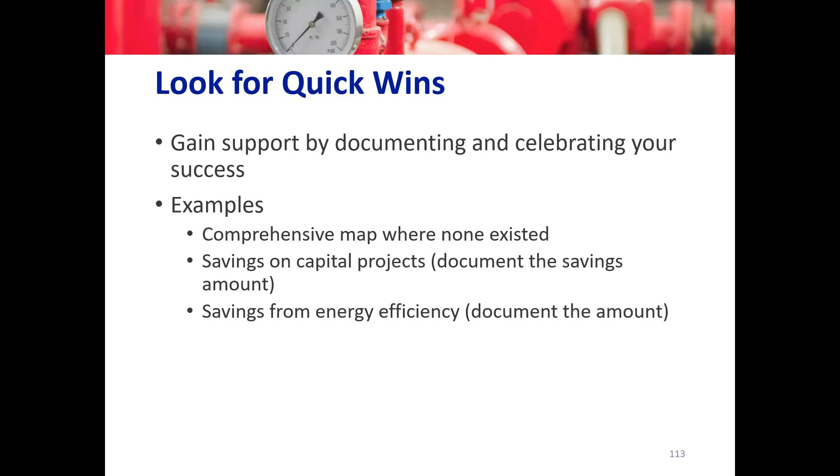Documenting savings from energy efficiency can also be valuable. So the asset management plan involves documenting what you've done and will do. Keep it both simple and sustainable. It is important to update annually, or periodically. Annually helps. That's a good idea. A lot of utilities update their inventory and maps continuously as projects are done. You might also consider coordinating and integrating with other plans that your utility or your community may have as a whole.

So in summary, asset management is the way you will do business going forward. It's never done. Neither is utility operation, neither is utility management. It's not about working harder. It's about working smarter. So here's a good video, again, from Old Forge, New York. I think that picture sums it up.

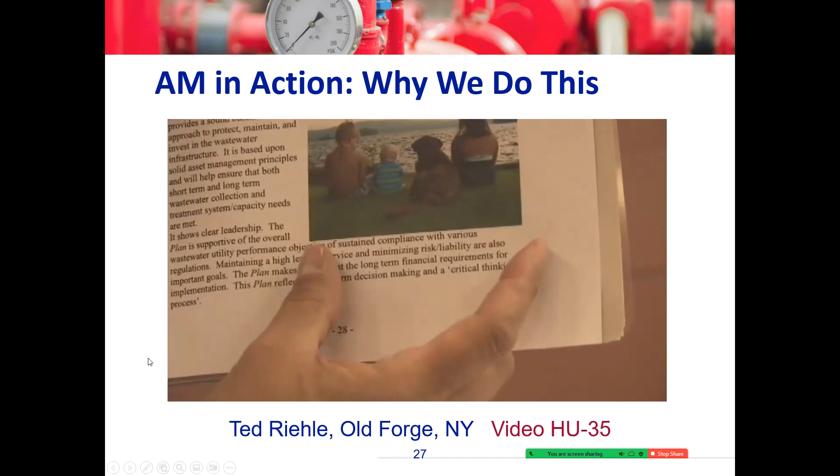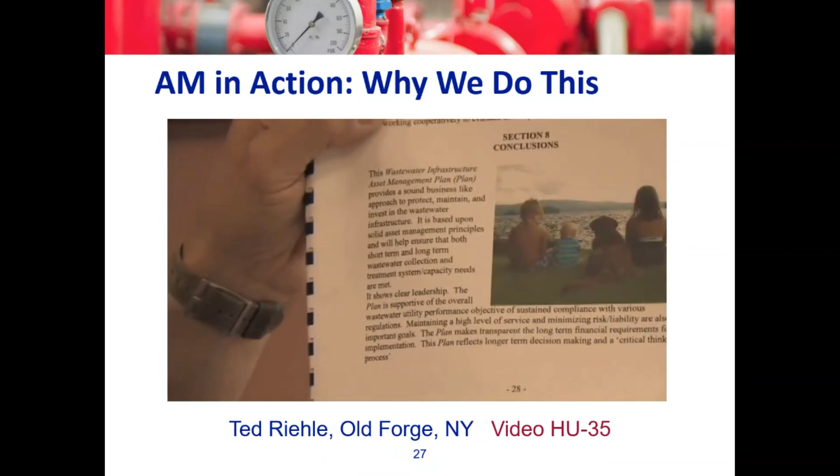And this photo was taken from our publicity website. It was entered in a photo contest, and it's taken right up here on the Fulton Chain of Lakes. And you got kids and a dog sitting on the shore of the lake, and that's the ultimate goal. We want to protect our waters. We've got a number of lakes and rivers in the area, and that's one of the reasons people like to come here. This is right out behind the wastewater treatment plant, and as you can see, we have a direct discharge to the Moose River, and it's a scenic waterway as well as a classified trout stream.

In the background you can see Route 28 coming into town, and on any given weekend there are hundreds and hundreds of canoes and kayakers that go up and down this river. People use this for fishing, swimming, boating, and with the direct discharge right here, making sure that our wastewater treatment plant is everything that it should be is pretty important. Then from up in your neck of the woods. All you old school public works guys out there that are looking at this, give it a chance.